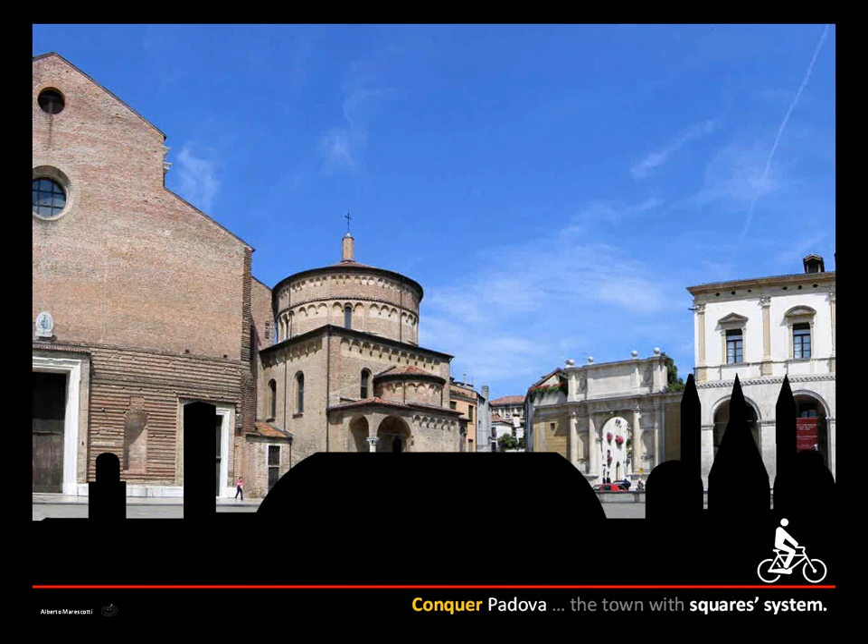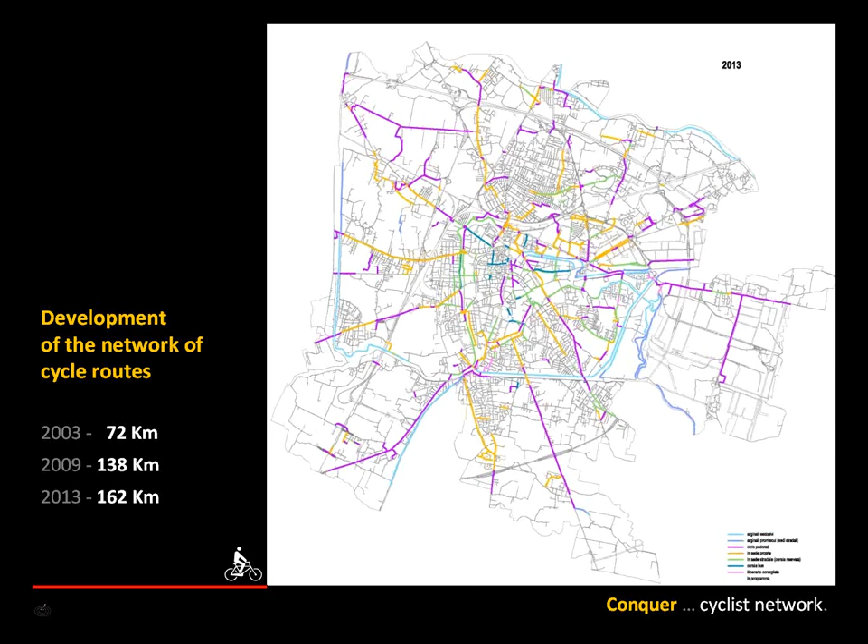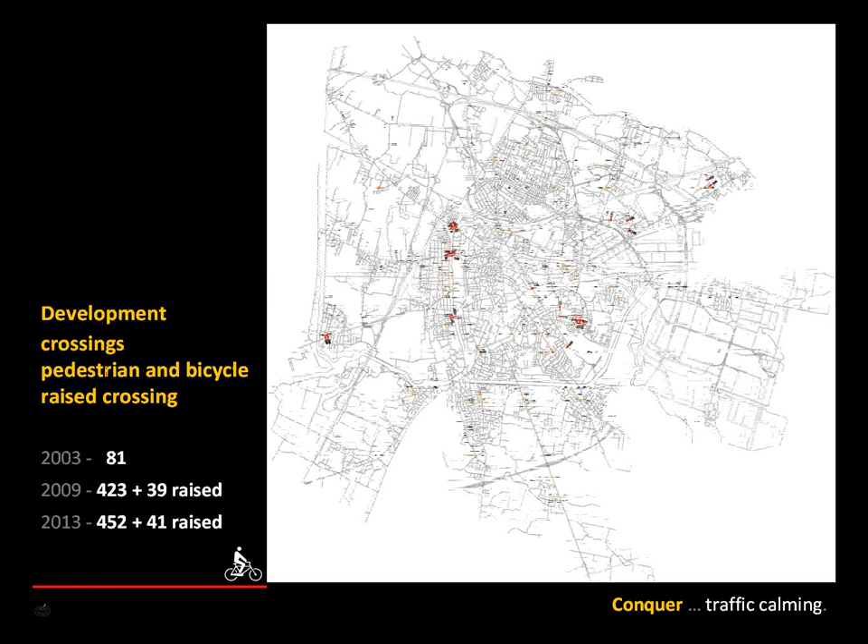There is the network of cycle roads in 10 years. Then the development of roundabouts in 10 years, and the pedestrian raised crossings. This kind of interventions carried out over 10 years have achieved results on the reduction of urban accidents. Pedestrian, cyclist, minus 13 in the last 3 years. And in this slide, the comparison with the national statistics: Padua from 2003 to 2009 has had a reduction of accidents that was essentially twice the national average.

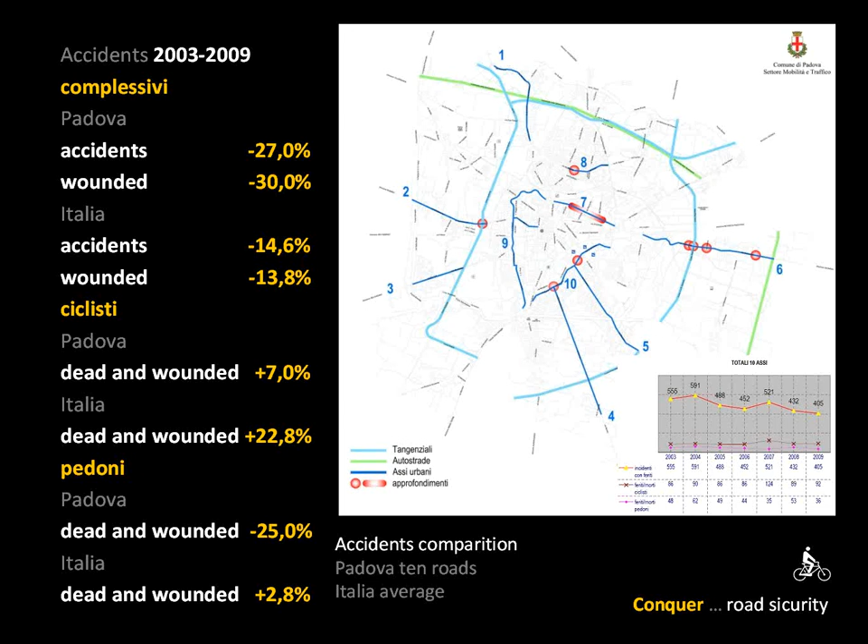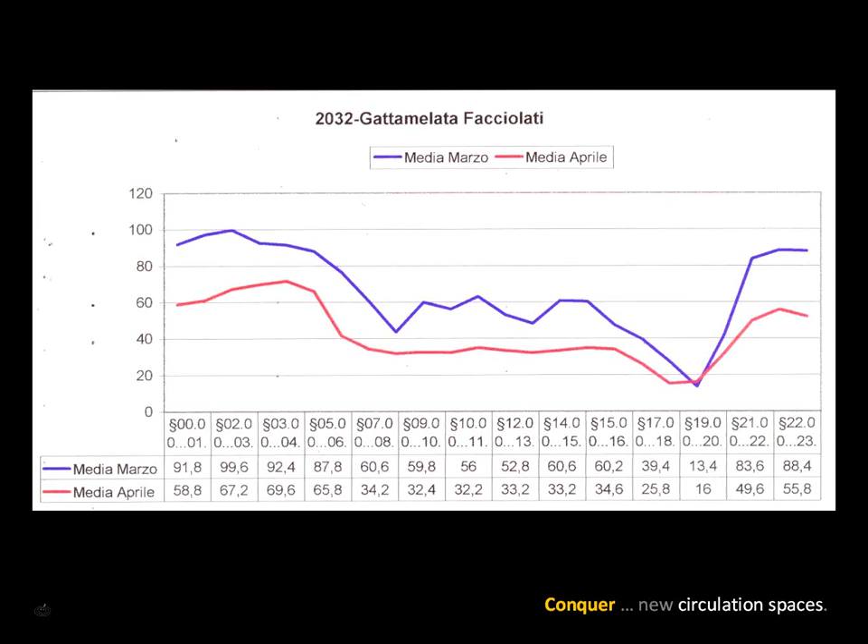In particular, the study on pedestrian and bicycle raised crossings. This has been accomplished at a point where speed is registering. With the construction was measured speed reduction over 24 hours. During peak hours, the reduction is practically nothing. At other times, the decline is on average less than 30 kilometers per hour.

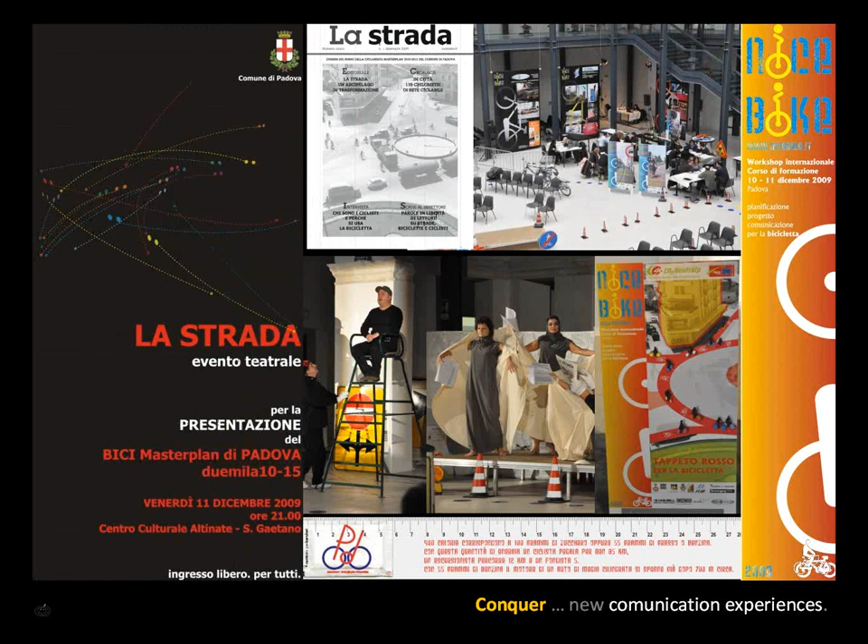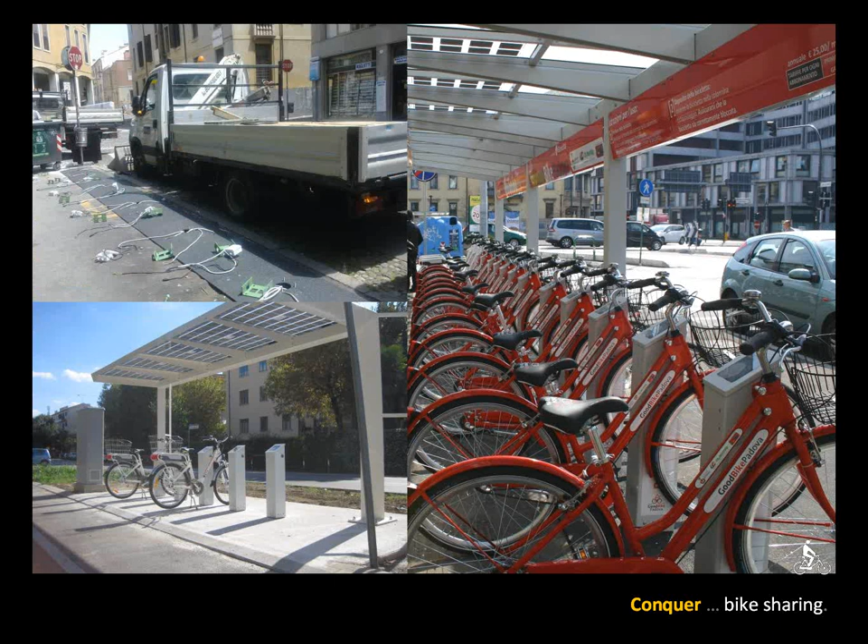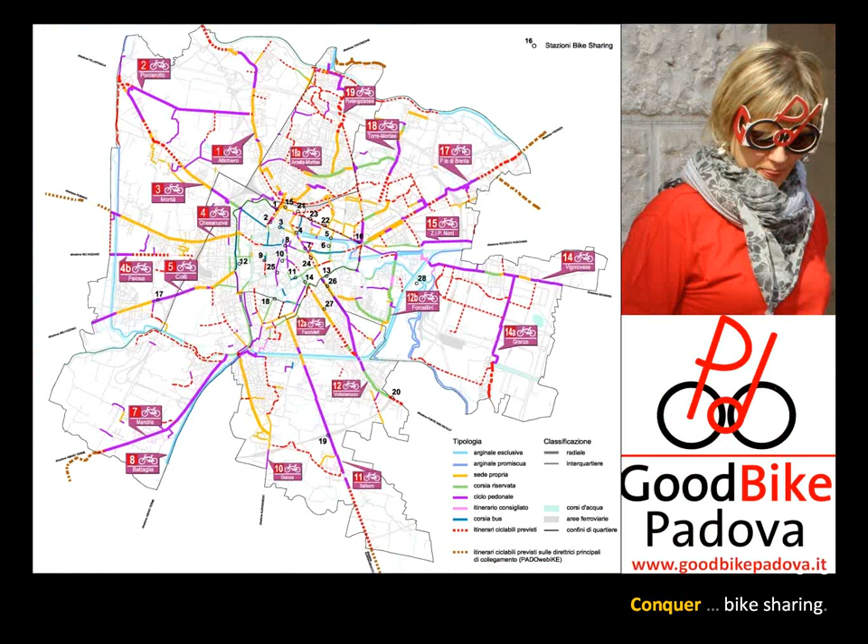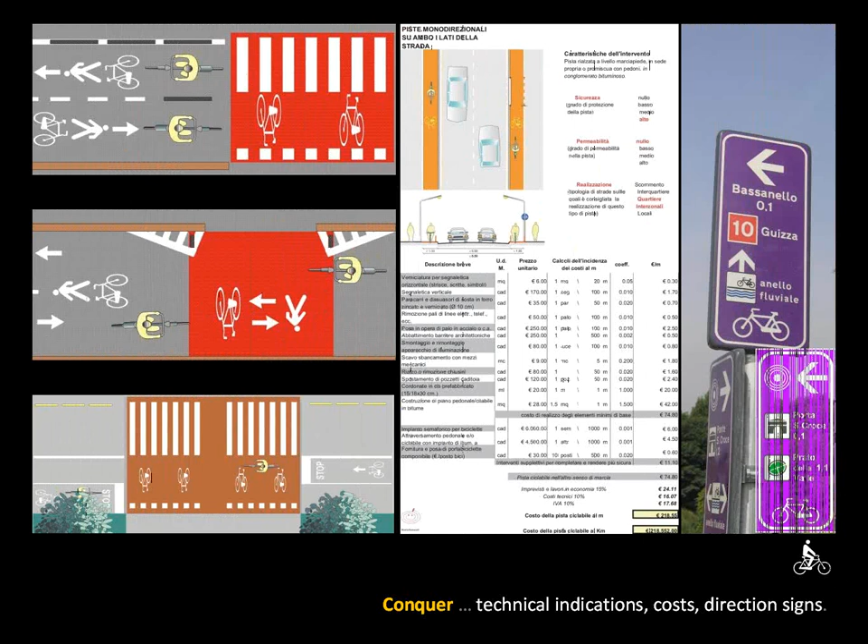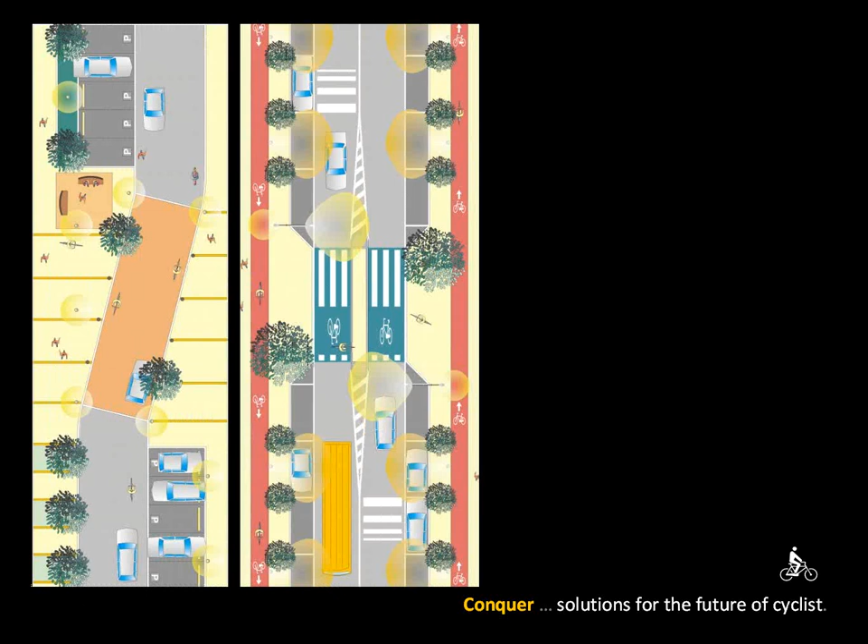The plan offers a lot of technical indications, costs for 17 types of cycle routes, and the development of cycle-specific indication signs. For children, there are a dozen home-school routes. In the plan, there are specific indications, guidelines on the design for solutions in private urbanization plan projects. In particular, solutions are studied for pedestrian and cyclist crossings.

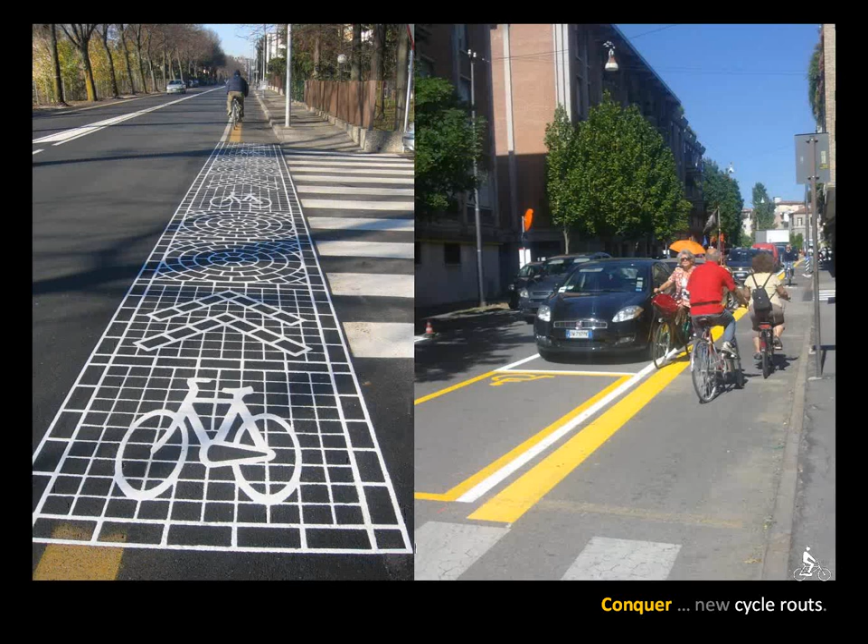These samples show facilities for cyclists ranging from bike lanes, one-way streets, and against vehicular traffic. This sample shows the use of design, colors, solutions in bus stops. In these cases, the track is separated from traffic.

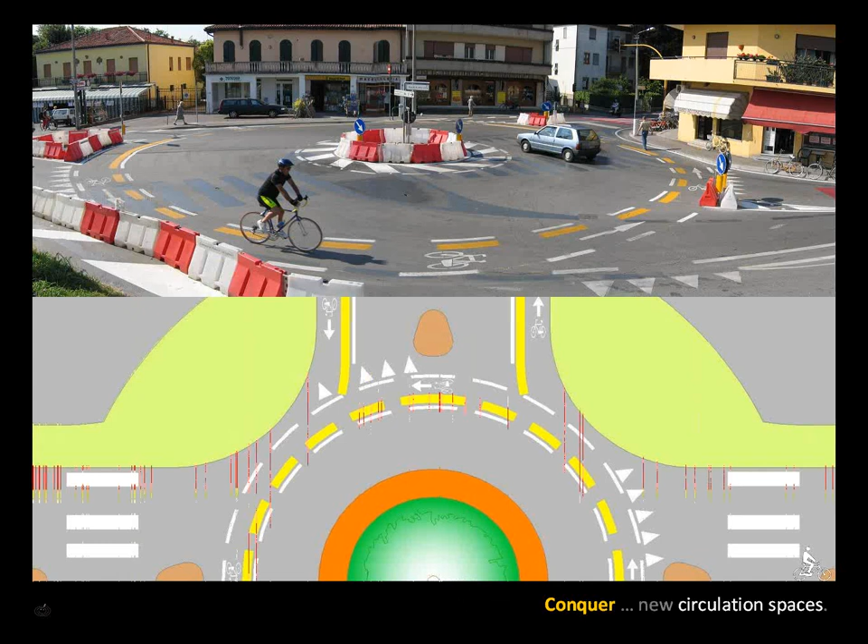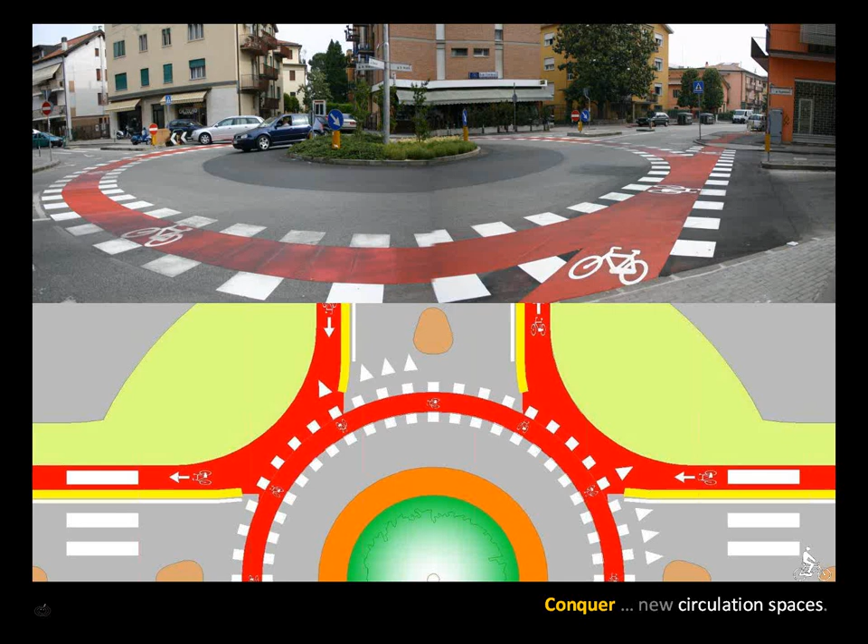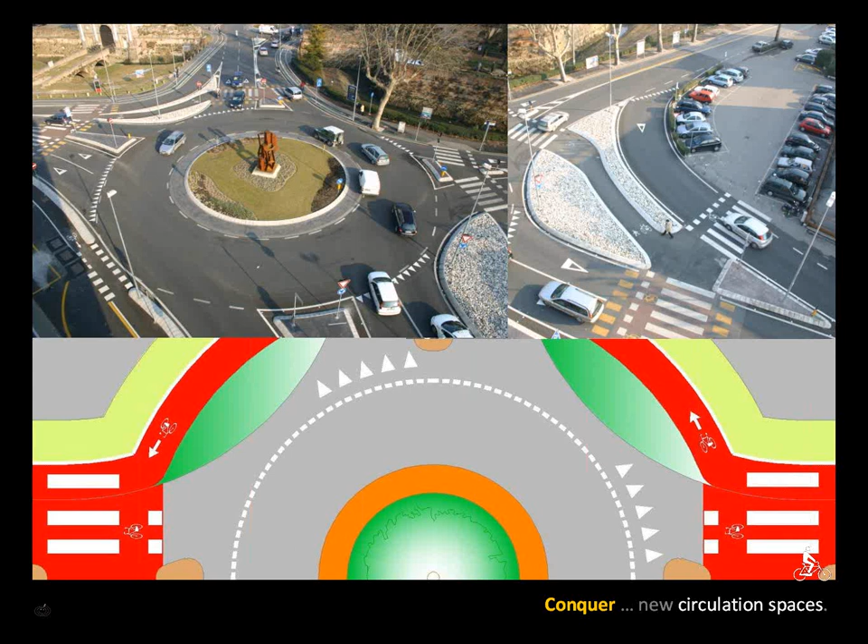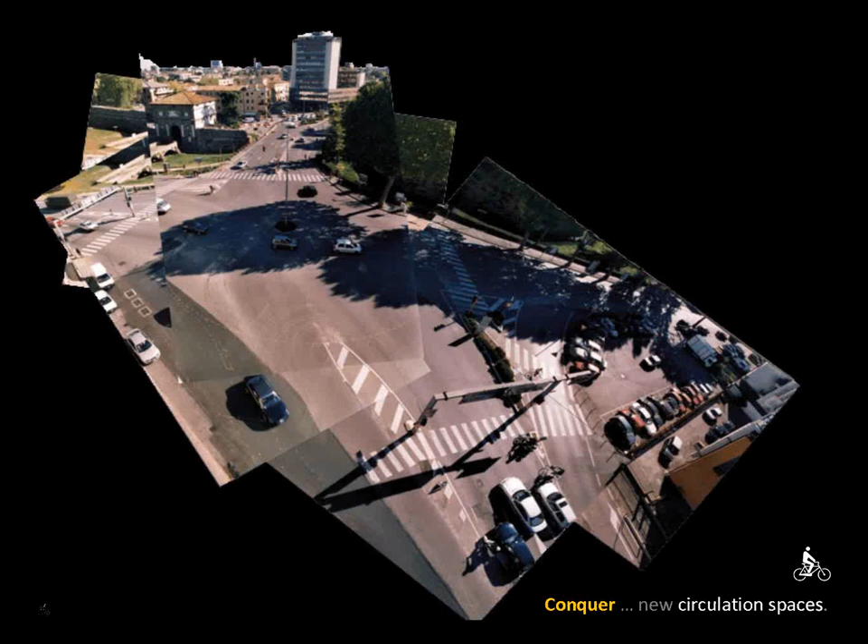These are solutions for cyclists in the roundabout to approach with a cycle lane and with a crossing sign, more complex in construction and maintenance. This is the most significant example, the large roundabout, 32 meters of diameter, in which the cyclists were accommodated in a private, reserved and external lane with specific crossing signs. The example shows the 3 steps of construction through the traffic lights and the roundabout provisional and definitive work.

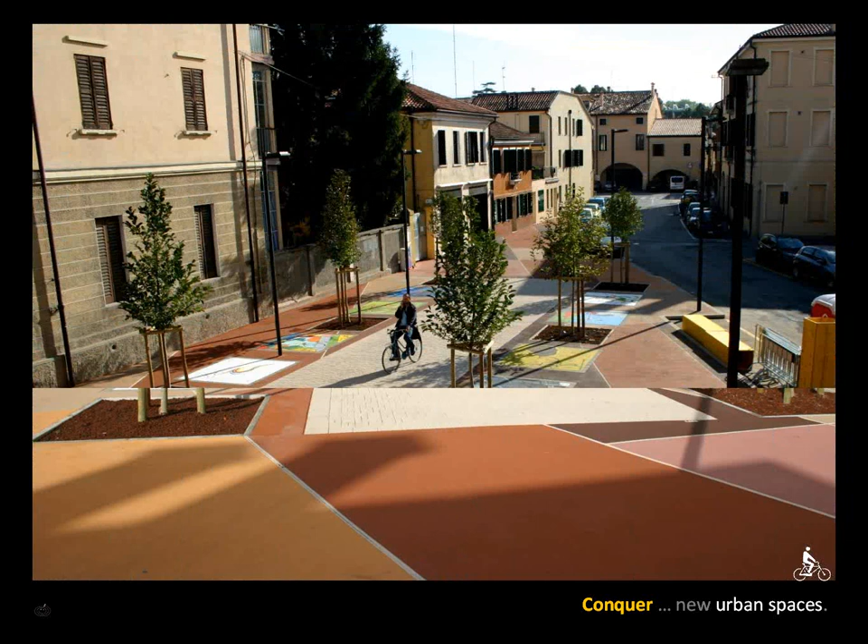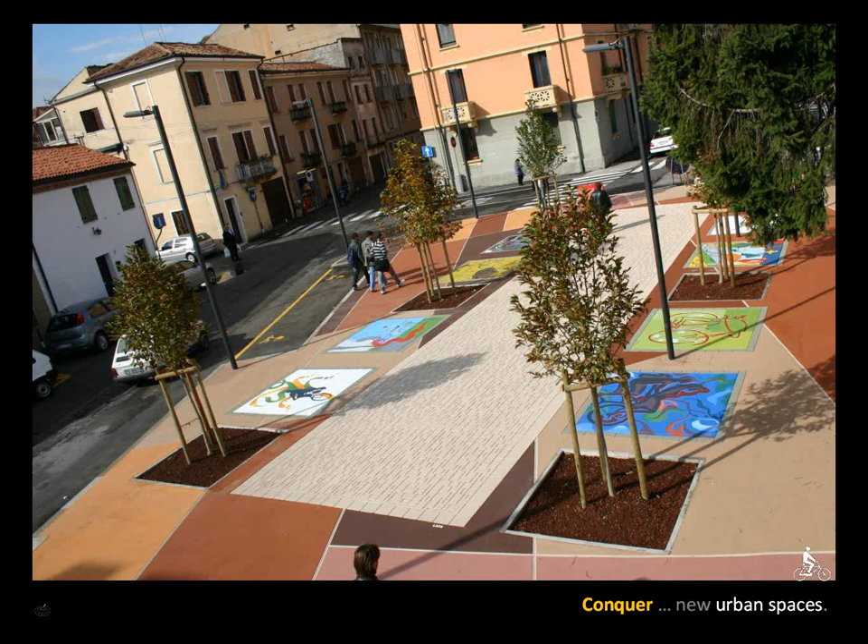Roadworks can also become urban redevelopment even if they remain places of vehicle transit. And traffic calming solutions may be opportunities for the creation of urban spaces. This square has been designed with a deviation of the historical road. With a background design of Paul Klee, 6 new trees were planted instead of none. Thanks to a competition that involved the Art School of Padua on the theme of bicycles, 8 boxes were made that remain over time, at least since 2007.

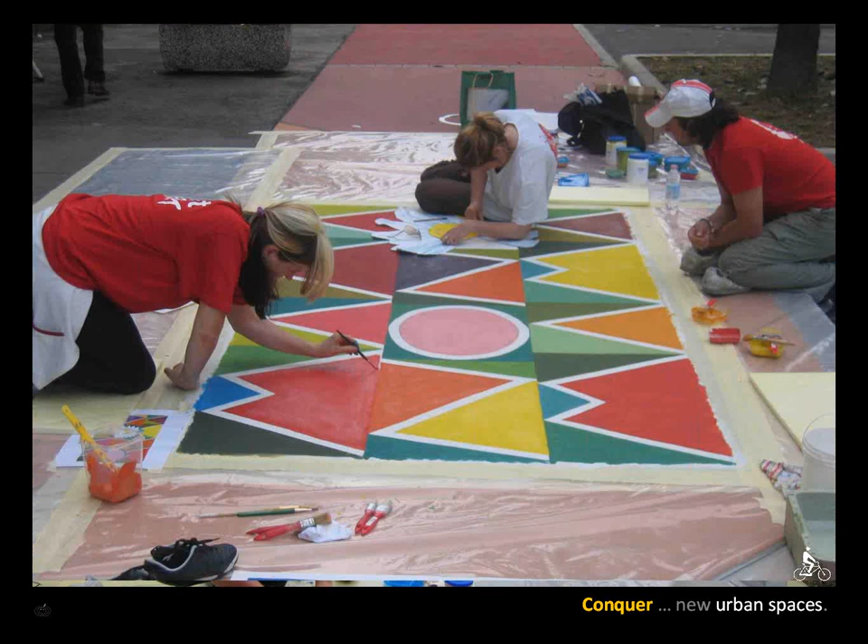This case shows a suburb of Padua that has been reborn in 2008, a participatory process between citizens and municipal administration, which lasted almost 3 years since the end of 2005, and that has allowed us to achieve a number of interventions required, known and expected by residents. Public meetings, debates, participatory planning, management of conflicts between residents, traders, district and municipality, and on the uses of those living in the area.

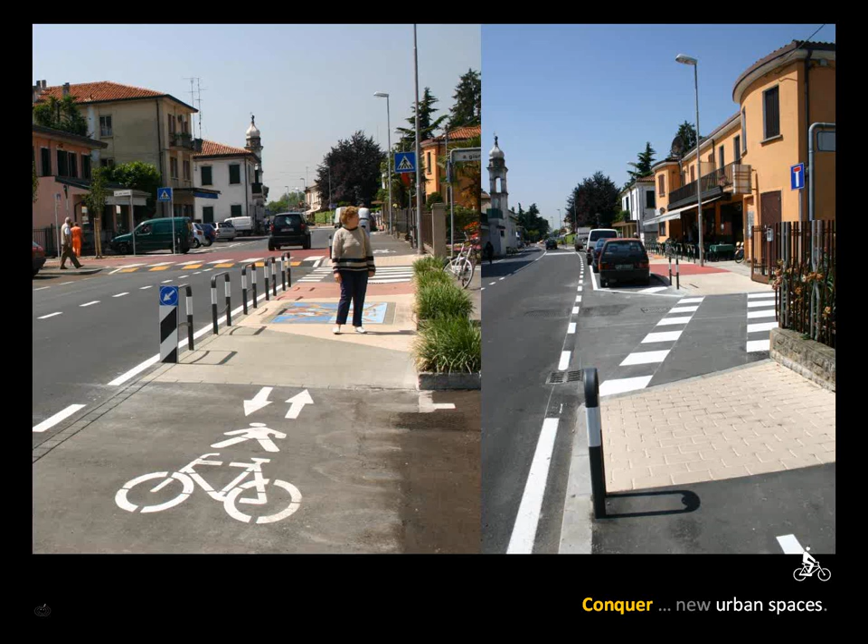The winning elements of the participatory process were strong identity and sense of belonging to the area by residents and local businesses, a positive climate and proactive citizens, ability to manage the process by which the district has hired a specialized association, coordination of the activities of participation, confluence of loans from the underground company and from the municipality for the neighborhood and mobility.

A reasonable time in the organization of the different phases of design, execution and custody of work, good coordination between the activities of municipal departments and professional capacity of the companies involved in the works. Excellent skills of local companies in proposing initiatives and innovative materials in contemporary urban quality. Thank you. My English is...

Thanks, Alberto. No, I think it's good. It's good to have somebody who really has a role in a city like Padova, like you, because it's exactly the scope of the thematic groups, to bring together those people who work, who are not only designing solutions or making dissemination activities, but have the knowledge also of the various issues. I like a lot also the process that you applied in the suburban area of Padova, and also the use of colors for transforming roads.

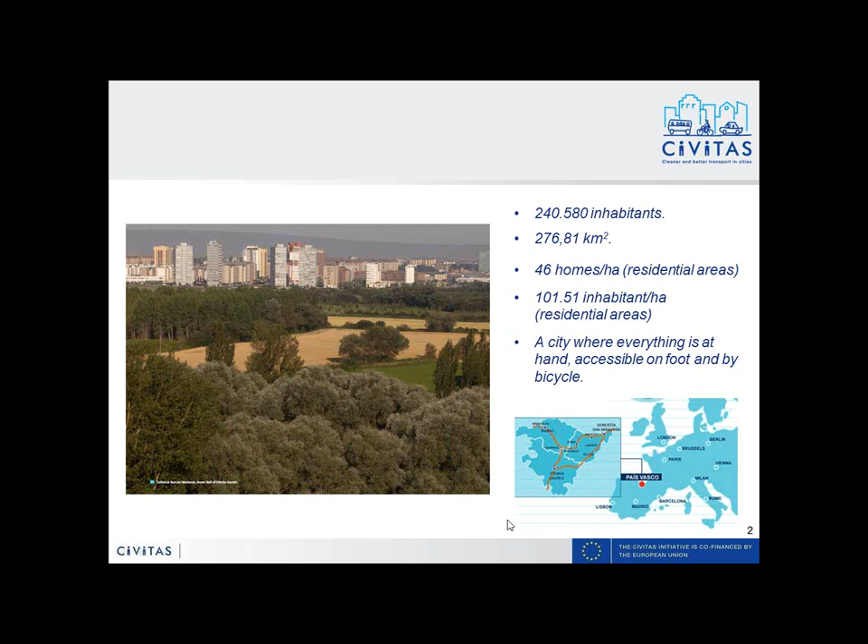Could you pass the slide, please? Chiara? Juan Carlos, it's you that has to pass the slide. But I don't know what. Yeah, here. Sorry. You're welcome. Okay.

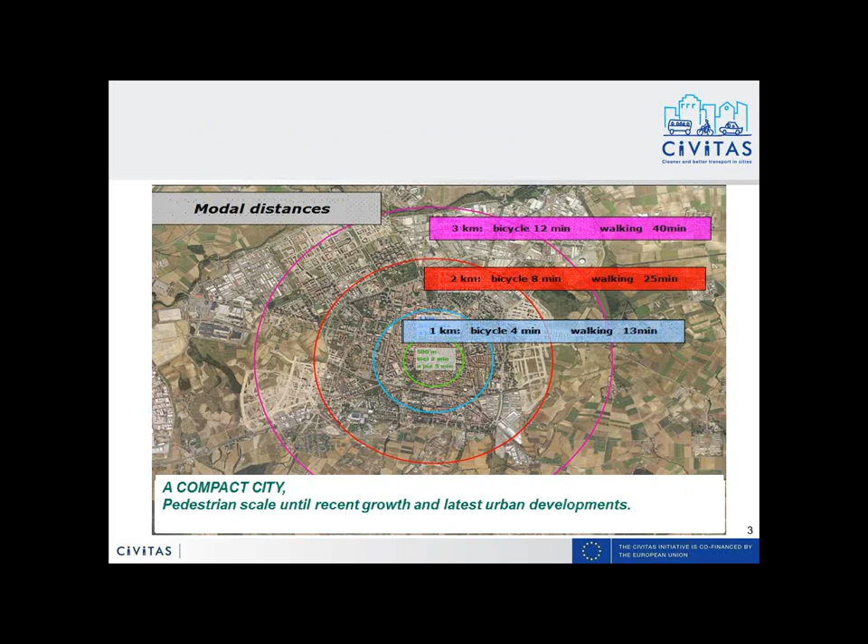Here you have, for instance, a clear shape of the city, and really it's a compact city with no more than 3 kilometers from the border to the city center, and inside this 3 kilometer radius circle lives nearly 98% of the population of Vitoria-Gasteiz. It's also a flat city, so really a fantastic city to enjoy walking or cycling.

In order to change some worrying trends we had at the beginning of the 21st century, it was decided to establish a sustainable mobility and public space plan in the city, with the main goal not only of reversing the upward trend in the use of the private car and transferring car users to public transport and the bicycle, but also as an opportunity to preserve the quality of the public space and give the streets back to the citizens.

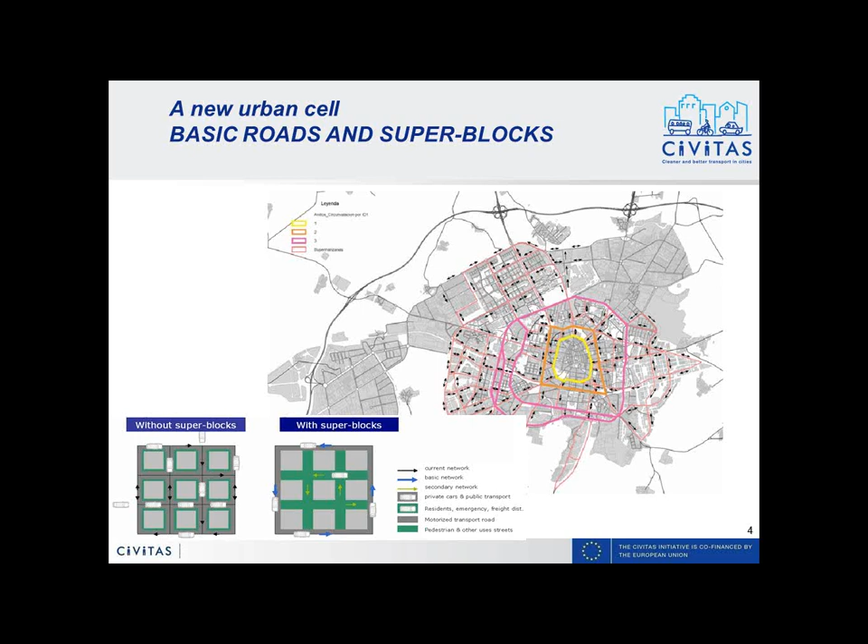This way, the Sustainable Mobility and Public Space Plan established an integrated system of mobility and public space based on the concept of superblocks, a scheme that established different networks for each transport mode, thereby reducing the conflict between pedestrians, cyclists and vehicle traffic. The idea is to establish a new hierarchy in the roads in order to channel the through traffic mainly in a select pool of roads, no more than 15 or 20% of the roads in the city, and preserving the rest of the roads as calm areas where the idea is to share the space among the different users of the public space. This is the basic idea of the scheme of the superblocks.

This scheme will provide us the opportunity to give back the public space to the citizen. Here you have what could be the allocation of the public space in the before and after scenario, once the superblock scheme is implemented to the whole city. It will be possible to change the undemocratic share of the public space.

For instance, in the 2006 scenario, we had nearly 64% of the public space focused on the private car and only 36% to the rest of the users. The idea is, after applying the mobility plan and using the superblock design framework, to revert this distribution and recover nearly 71% or 70% of the public space for the rest of the users, focusing only 29% of the public space on cars.

Fortunately, after the first five years of the Sustainable Mobility and Public Space Plan, it seems we have succeeded in reversing the rising trend of private car use. At this moment we are recovering the protagonism of pedestrian displacement in the city, and we have decreased the use of the private car, improving a lot the use of the bicycle. At this moment, Vitoria-Gasteiz is the city with the highest use of bicycles for urban mobility.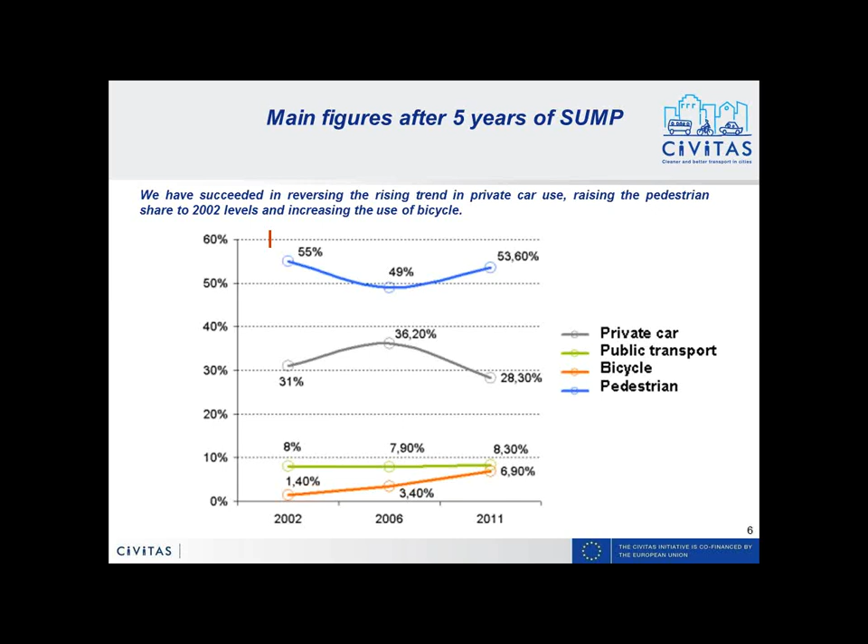The fourth focus, after the successful redesign of the public transport network, is the consolidation of the active mobility network, for instance the bicycle mobility network. The idea is to extend the network up to 150 kilometers of segregated bike lanes, but the effort should focus on consolidating the superblock scheme as soon as possible and recovering calm roads for bicycles. This is the basic approach of the bicycle strategy in the city.

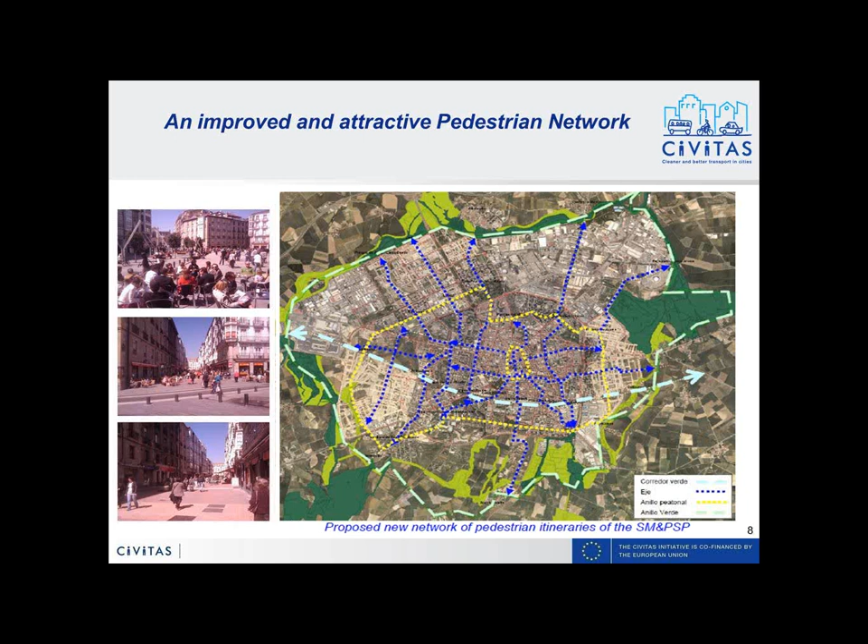Active mobility is a focus of the city and a value to preserve, but we have a problem with the important growth in bicycle use. At this moment we have a growing conflict between pedestrians and cyclists, because many new cyclists try to use the sidewalks, considering it unsafe to use the road.

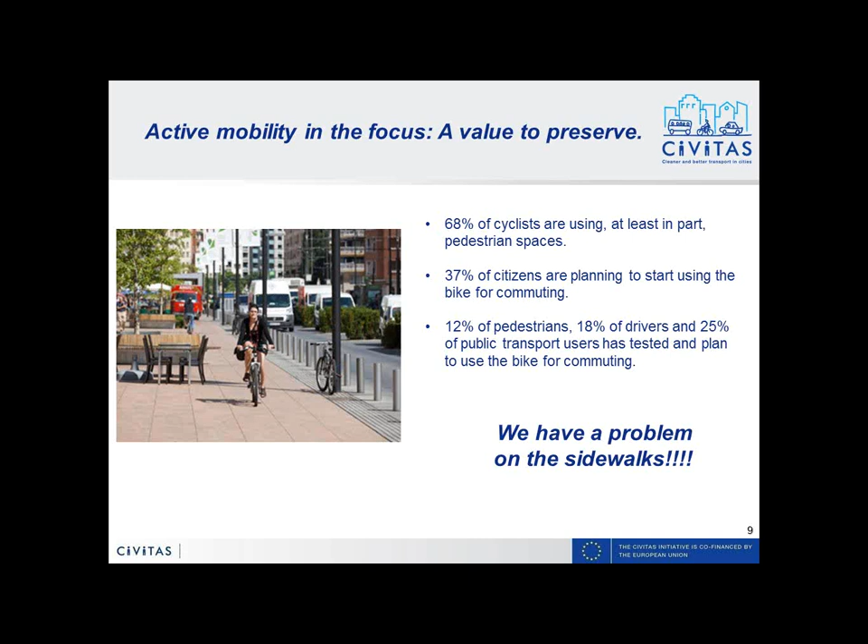The idea is to try to recover the road for cyclists. To establish this new scenario, we decided to implement during the last fall the road revolution I mentioned at the beginning of the presentation: a pilot area in the city center with 47 new streets where we implemented low-cost interventions to improve road safety for pedestrians and cyclists, reduce emissions of pollutants, and reclaim space for pedestrians.

The idea is not to stop here, but to extend the measure to the whole city. In the slide you have the map with the intervention area in the city center, and a scheme showing the type of intervention implemented, all of them low-cost, mainly using painting and public elements.

Using elements like bin collectors or reduced mobility areas, and so on, to obtain a calm road. In order to improve permeability for cyclists, we decided to transform many of the one-way streets in the city center into two-way streets only for bicycles, recovering one of the lanes for cyclists and inverting the direction of traffic, but only for cyclists.

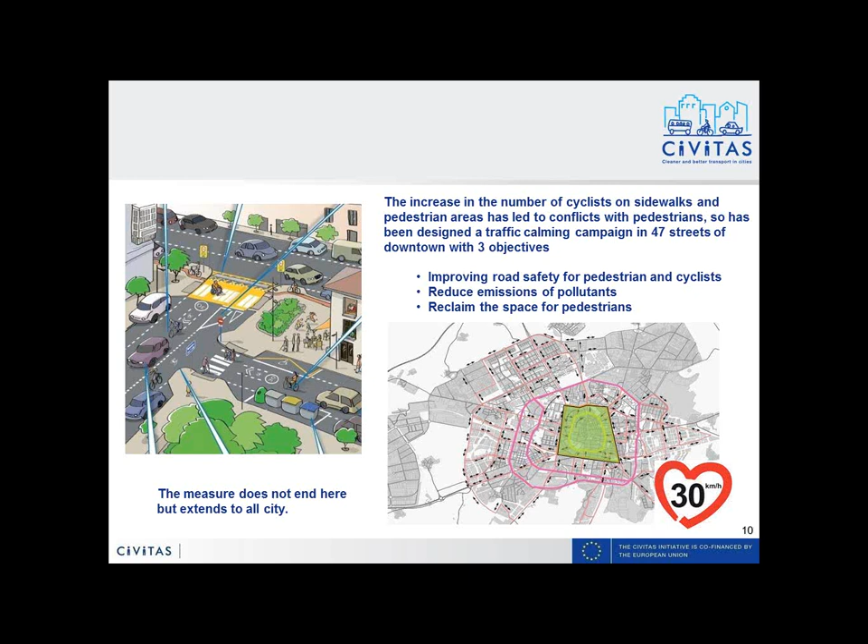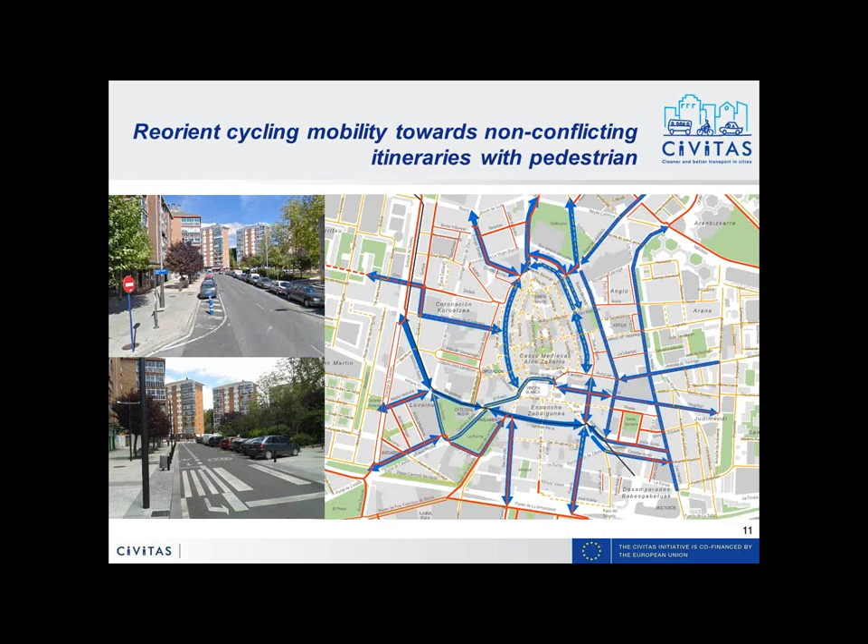The idea is to use this kind of intervention to reorient cycling mobility towards non-conflicting itineraries with pedestrians in the city center. This is the idea we are trying to apply with interventions like the one shown in the picture, on the left side, with the before and after.

Here you have many other pictures, some with low-cost intervention, but others, like the first one we have there, could be done after the restoration of services on those streets. It's important to have a clear idea of the final design of the street in order to use the opportunities to continue working toward the long-term scenario in the Sustainable Mobility and Public Space Plan.

In the bottom example, you have a one-way street that, being so wide, was possible to transform into a two-way, bicycle-only street that is really useful in order to connect and complete the main bicycle network in the city.

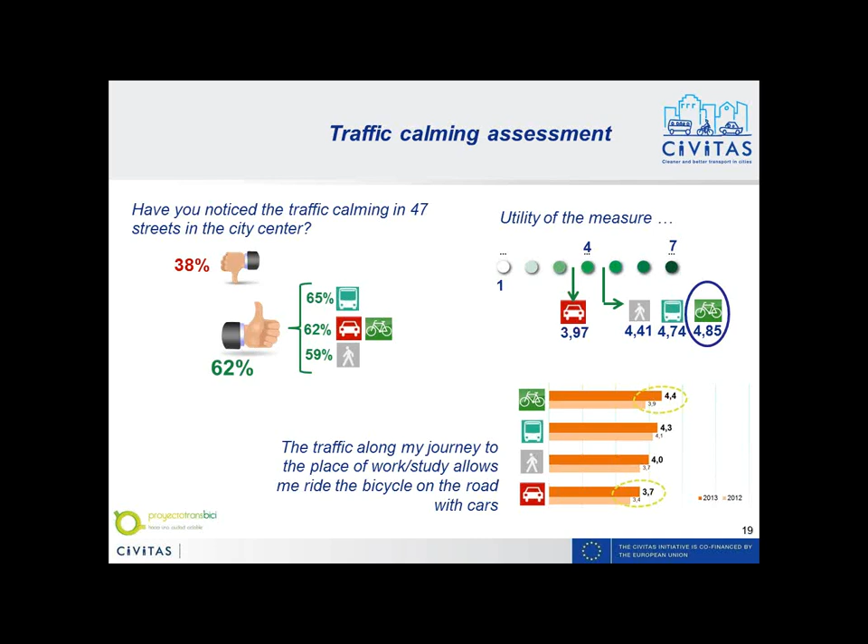So apart from the image I see here on top of the slide, it seems that for the other solutions you can do it in a very quick manner. So no need for investing years and money for new sidewalks, etc.

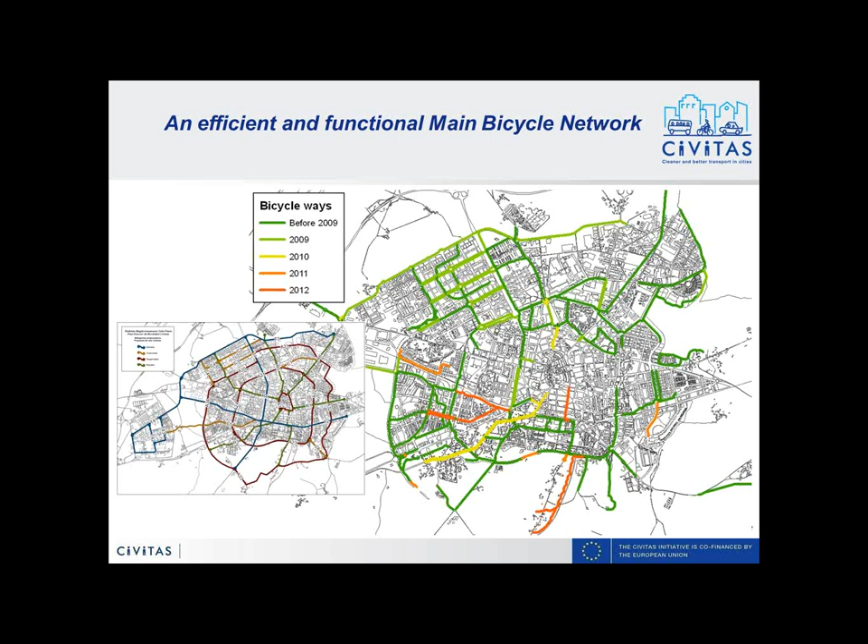But the idea is to work at the same time on calming the rest of the streets, the rest of the roads in the city, with the aim in the long term of having high quality designs.

For instance, the kind of designs you have in the top right picture, with this kind of interventions - the idea is not to stop, due to the crisis, implementing this long-term strategy, but to accomplish with low-cost interventions the superblock strategy as soon as possible, in order to continue with the strategy adopted by the city. So with this kind of low-cost intervention, if the width of the street allows it, we implement two-way streets for the bicycles, giving bicycles priority over cars in the calm areas, and using the new road design as a way to calm traffic. That's the idea.

I'm not sure if I've answered your question properly. Yes, thank you very much.

You're welcome. So it seems that you can also achieve this traffic calming intervention just by painting the streets, not only by having wider sidewalks, and you don't need to stop your ambitions due to financial reasons, because there are a lot of solutions you can implement.

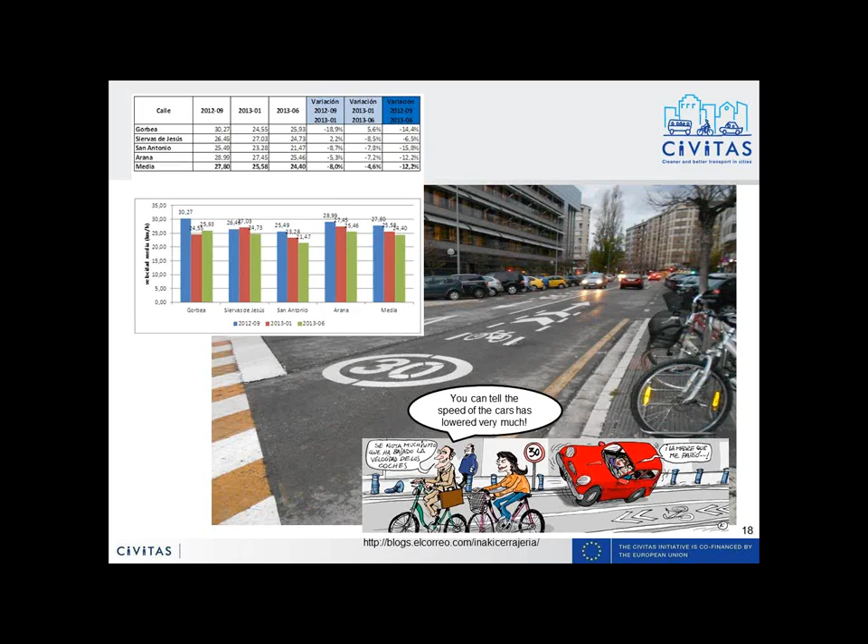Juan Carlos, many thanks for your presentation. I think it's extremely interesting, and each of these streets might be a case study - analyzing the before and after situation, and the different approaches, studies, and assessments you did to get the final results. It's really impressive. I think we can maybe give more space to Vitoria, to all the members and participants who would like more details on it. I don't know, Chiara, if there are other questions from the public, or if we can move on.

No, there are no further questions, so I would give the floor to Damien. Damien, are you there? Yes, I am. Okay, so thank you very much, Juan Carlos, for your presentation. And thank you, Cosimo. Thank you very much. So Damien, I'm giving you the floor as presenter.

Okay, let's wait for Damien. Oh yes, let me just introduce Damien Garrigue from Nantes Métropole.

The Chronobus experience is another extremely interesting example of how, starting from a different point - the need to improve classic bus lines - Chronobus now gives a good example of how classic bus lines can have a different operational program and approach to running their service. Starting from this need, there's also the possibility to improve the availability of public space and calm traffic on other roads. There are also interesting examples that Nantes implemented, especially in road use. So I give the floor to Damien, who will show us the Chronobus example in more detail. Thanks.

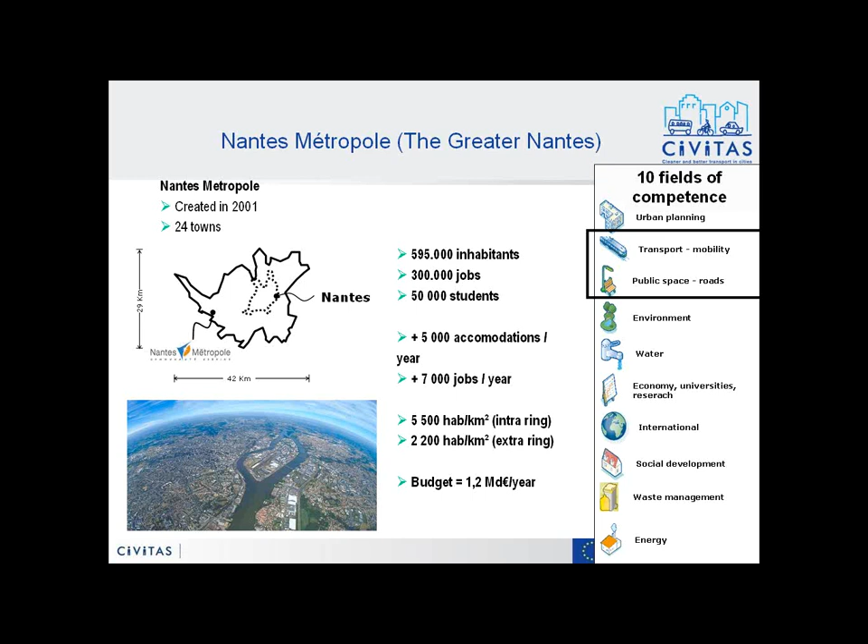We have 24 cities, and they gave a lot of competencies to Nantes Métropole, particularly mobility, transport, public space, and roads. That means that if we want to act on the road, we have the competence to do it and to decide how we will affect the public space for public transport, pedestrians, and cyclists. So it's easier to work, and when the decision is taken, we can act directly.

Some figures. I work in public transport, so I have a lot of figures about it. In France we have a specific tax that helps us finance the development of public transport - we tax companies on their salary mass, and the tax is about 2%. We have a very busy public transport network, and this year we overpassed 123 million passengers, that's 206 trips per inhabitant per year.

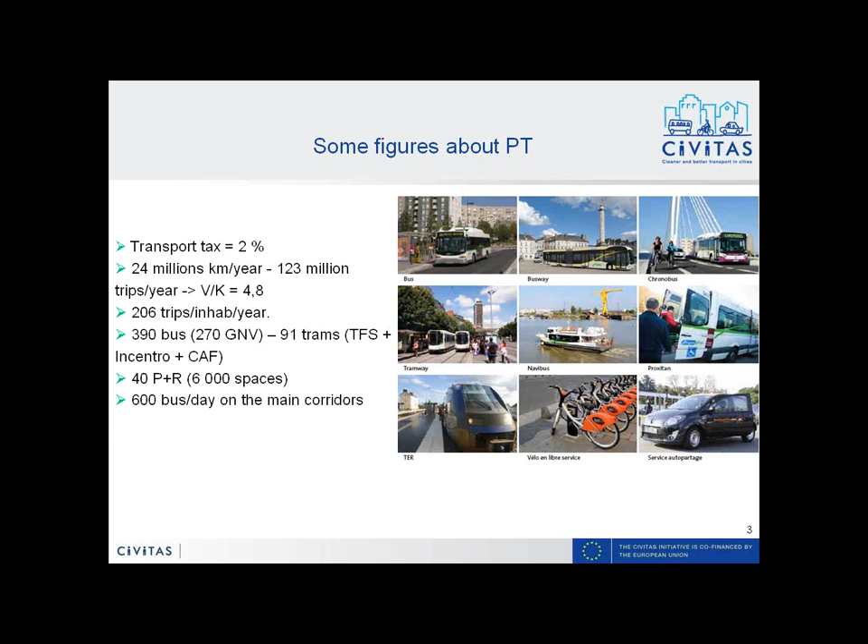We have a rolling stock of buses and trams, with a specificity: we use natural gas for most of our buses. We also developed a network with park and ride facilities, and around Nantes we have more than 6,000 spaces.

So this is our main network, with tramway lines. We currently have 3 tramway lines and 1 busway. I'll say a few words about this bus line, which is a little bit special, and the 7 Chronobus lines, which are our new concept in Nantes.

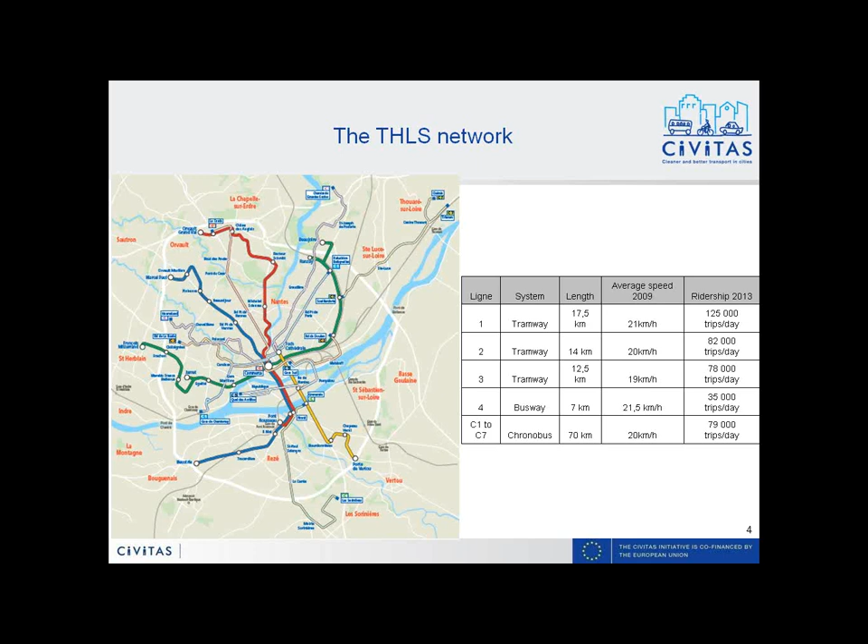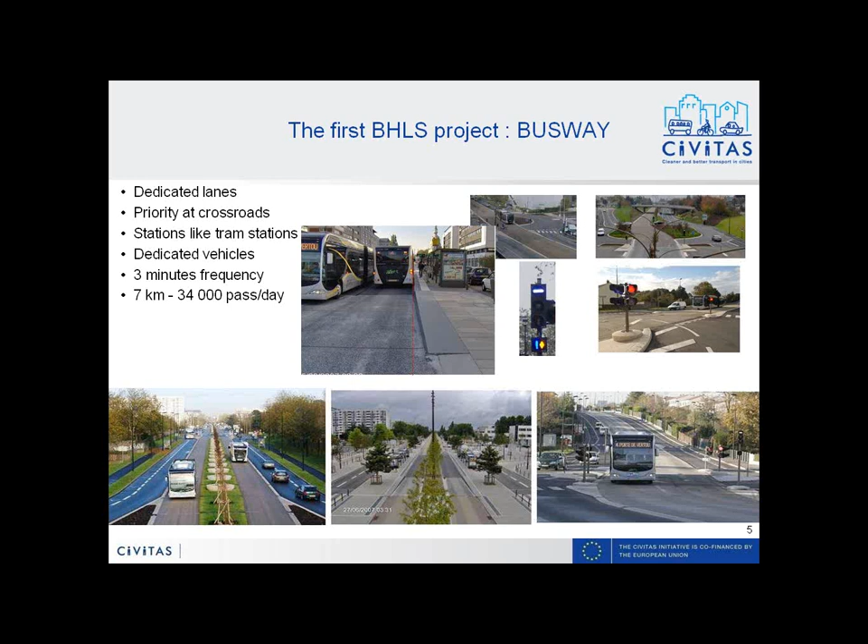Nantes was the first city in France to reintroduce a modern tramway, in 1985, and we progressively developed the tramway network. But for the 4th line, the cost of the tramway was very, very high. So we decided to design a project with a bus as the main vehicle for transporting people, but the design was made like a tram design.